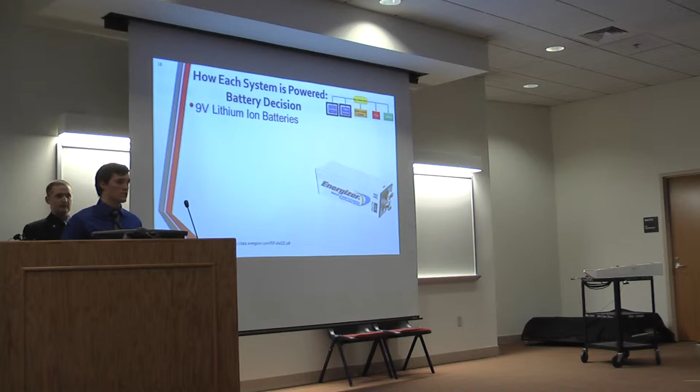For the battery decision, this was probably one of the most important decisions for me from a power standpoint: how we're going to power everything. We went with a 9-volt lithium-ion battery throughout for each system, because they're extremely light compared to alkaline batteries. The alkaline batteries are about 2 ounces; as shown here, it's 1.2 ounces for lithium.

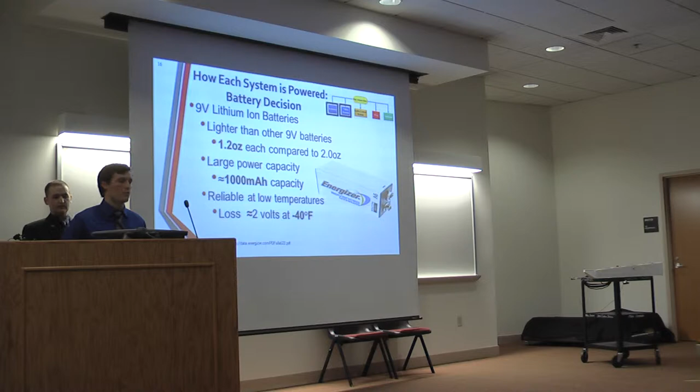Next, we also have a large power capacity. That's really important. An alkaline battery has about 600 milliamp hours. A lithium battery has 1,000, and it's lighter, so that's always important for our glider. It's also reliable in low temperatures, and it's very reliable under large loads, which is very important considering we have a large video system that takes up a lot of power.

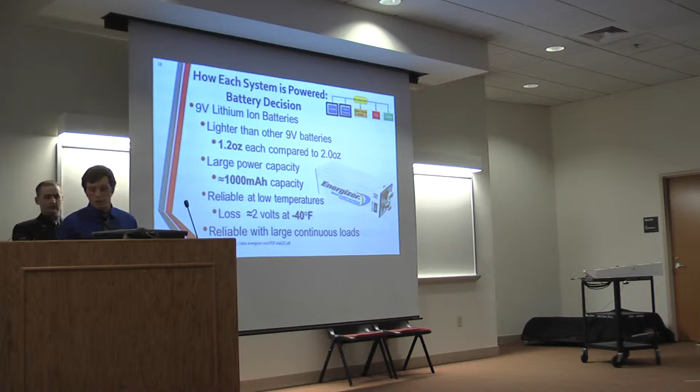So now I'm going to let Tanner talk about some materials. All right, when designing the fuselage that was going to hold all the components Jesse just talked about, we had a few design factors we really needed to look at. One was temperature. When you get to the higher altitudes, it begins to get colder and colder. Weight was probably the most important due to the FAA regulation of 6 pounds. Cost, and then also the strength, being able to hold the components and not just break apart.

So we narrowed it down to 3 common choices used in model aircraft: balsa wood, pine wood, and aluminum. In terms of strength, obviously aluminum is going to be the strongest. However, we found that all three materials met the requirement we were going to need. So we were pretty confident no matter which one we chose, strength-wise, we would be good.

In weight, when we drew the fuselage up and started modeling the different materials and seeing which would be the heaviest and lightest, balsa wood was going to weigh about half a pound compared to 3 and almost 8 pounds for the other materials. Then for cost, we found balsa wood was also going to be the cheapest, so ultimately we built it out of balsa wood.

This is the design of the fuselage. It was 32 inches long and we used a very standard truss structure down the length. The front of it was 6 inches tall, the back was 4 inches. This tapered shape is something you commonly see on model aircraft. And you can see on the bottom left picture at the bottom of the drawing, the line is a little thicker. That is representing the base plate that all the interior components were mounted to.

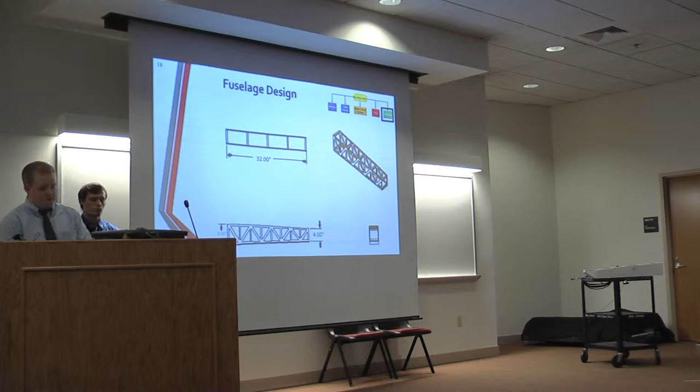So when we designed it, we knew we needed to do a little bit of analysis. We used a program called SolidWorks to do that. The purple arrows you see on the top picture are the applied force, and the green arrows are the fixed geometry areas. And on the bottom left, you can see that the main areas of deformation were on the vertical supports. But we did find that it was such a small amount that we weren't really concerned with it.

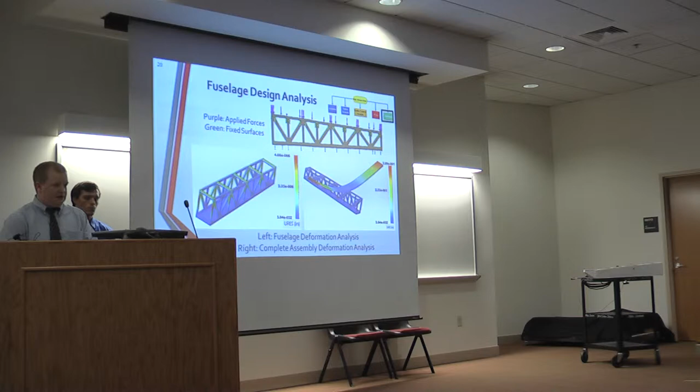And then on the right, what we tried to do was simulate lift under a basic wing. And as we expected, the highest deformation was at the tip of the wing. And once again, it really wasn't a very large number, so we weren't overly concerned with it as well. I'm going to pass it off to Aaron to give us a little aerodynamic design.

So we need to take those avionics and video systems that Jesse talked about, put them inside of Tanner's fuselage that he just discussed, and we need to make that fly. So that's where this wing design and aerodynamic analysis will come into play. So there are three primary areas for the wing design we need to consider. That would be your airfoil, your planform, and your structure. So the goal is to create an aerodynamically stable wing that produces sufficient lift.

It's 1/2 times the air density times velocity squared times the surface area of your wing times your coefficient of lift. The drag equation is pretty much the same equation, except instead of coefficient of lift, you have coefficient of drag. We have no control over air density. We have a little bit of control perhaps over velocity, but our primary areas of design would be the surface area of the wing and the coefficient of lift.

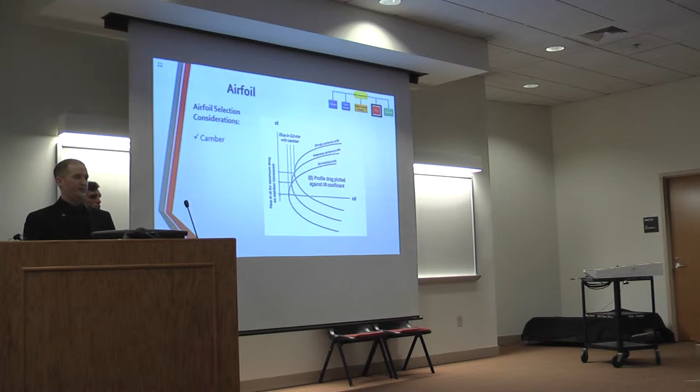And then also with camber, I have here plotted coefficient of lift in the y versus coefficient of drag in the x. As you get more camber, again, that more arched nature of your airfoil, you're going to move up and to the right on this graph. So a strongly cambered airfoil will produce a higher coefficient of lift, as we saw on the previous graph, but it will also make it so that you'll have a higher minimum coefficient of drag. A give and take nature with your camber of the airfoil.

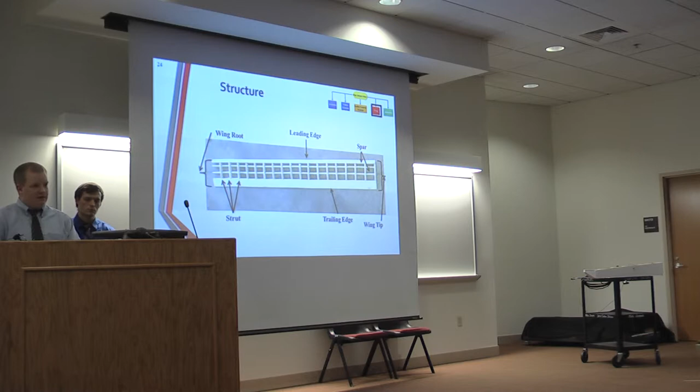So once we had everything together, we had to put together a weight budget and see how heavy we were actually going to be. We found that the glider weighed approximately 2 pounds, and the release pod that was going to drop the glider weighed roughly 1.5 pounds, giving us a total weight combined of 3.5 pounds, well under our 6-pound goal. So we were pleased to see that, just in case we needed to add anything. We had plenty of room in the weight budget. Pass it off to Jesse, who's going to talk about the project budget.

All right, for the project budget, we had some very important components that we had to purchase, and some of them were pretty expensive, like the video camera. Our total cost was $1,168. What was nice though is USI actually provides the Endeavor grant, and the Endeavor grant is really important for scientific research. We actually applied for it, and we did receive the award of $1,096. They helped reimburse the engineering department and ourselves for the project, so that was really good.

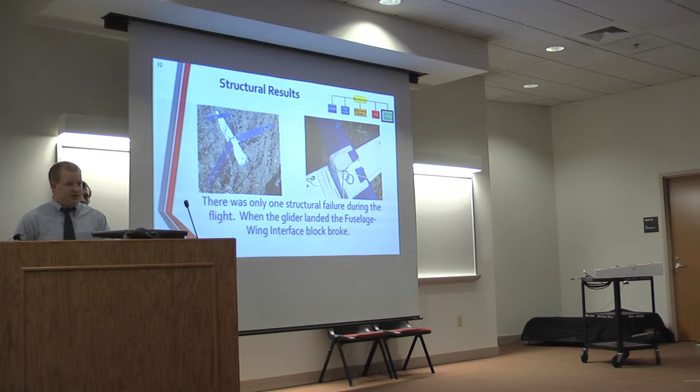So it wasn't a huge concern, but one thing we were talking about is the potential of changing the material of this block to something a little stiffer. Passed off to Aaron for aerodynamic results. So just to briefly discuss what we think the video shows as far as the aerodynamics. So I think it's a combination is what we're seeing.

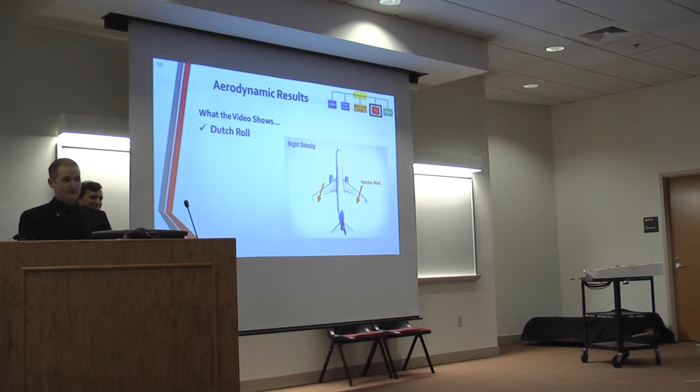So the first thing is what we call Dutch roll. I'm not talking about these sadly, but with Dutch roll, the nose of the aircraft will be pulled slightly to the right, and that wingtip will be pulled slightly down. Well, you have that dihedral I talked about earlier. It'll try to right your aircraft, and then the tail will generate a little bit of lift, and you'll get a left side slip. So it repeats itself, so you get this kind of tail wagging motion back and forth.

That comes from not having proper tail area. After the flight, we ran through the calculations and found our tail area should have been 27.6 square inches. However, we actually only had a tail area of 8 square inches. So quite a big deal there. You might say, though, that it's obviously not a back and forth motion, although we did see a left and right change. So I think the second thing going on is what we call static margin,

or rather an issue with our static margin. Static margin is simply the length between your center of gravity and your center of lift. So flight day we were trying to measure this, and I don't think we got it measured properly. So what I think happened is that rather than being about 12% back from leading edge like it should be, we were further forward, so that caused the nose to be pointed mostly to the ground and caused what we saw in the video.

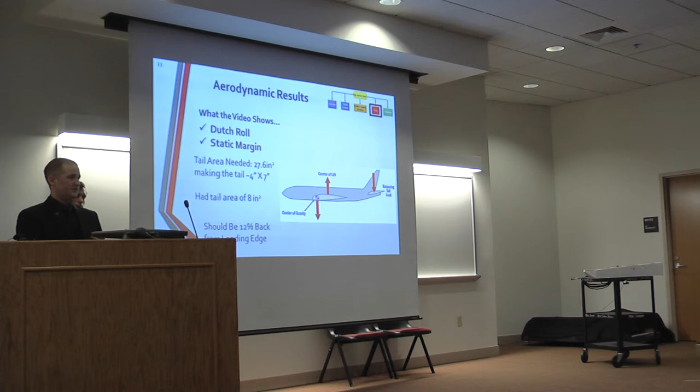It also could be that it was just a static margin issue, that our center of gravity was just too far forward and the wings simply stalled. So there may have been no Dutch roll, but it's quite a possibility. And I'm going to pass it on to Jesse to talk about our control system design. So for the future, and since we couldn't get the COA, we actually did design the radio control components of the glider. It's mainly in our paper, but we just would like to show you guys.

Basically, the radio control design would be communicating with the glider so we can control it on the way down. Basically, it's divided into two subsystems. We have the ground station, and we have the glider, and from the ground, we could actually use a remote to control it via live video. So that would be really neat. Now I'm gonna let Tanner talk about the control surfaces.

All right, so after looking into what we were going to need in order to control it, we determined we would need 3 different surfaces. We would need the ailerons highlighted in green, the elevators, which are highlighted in purple, and the rudder, which is highlighted in red. The elevators are used to control the pitch of the aircraft. The ailerons are used to control the roll, and the rudder controls the yaw. And you can kind of see what those entail on the picture on the right.

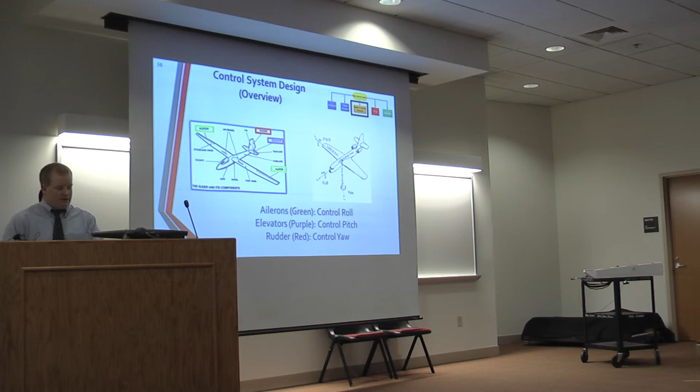So a basic layout of our elevator design, we're just going to use a standard control surface on the tail wing, connected to one linkage. Then the linkage would connect to where we were going to make a servo housing underneath the wing, figuring it would be the heaviest. And that's where the red linkage on the picture you see is headed towards. Didn't really fit in the picture.

For the ailerons, it was the same idea. The servos that would control it were in the same area. There'd be a shaft run through the ailerons on the wing that would control them. And the picture on the bottom is kind of representing what the ailerons would do. When the servo was at plus 90 degrees, the aileron would be facing up. When it was at 0, it would be leveled out, which is in the black.

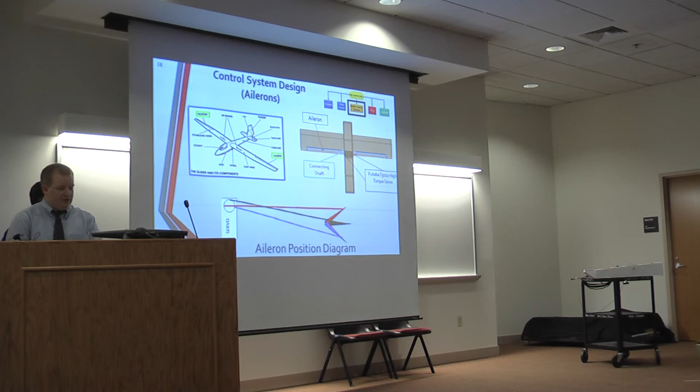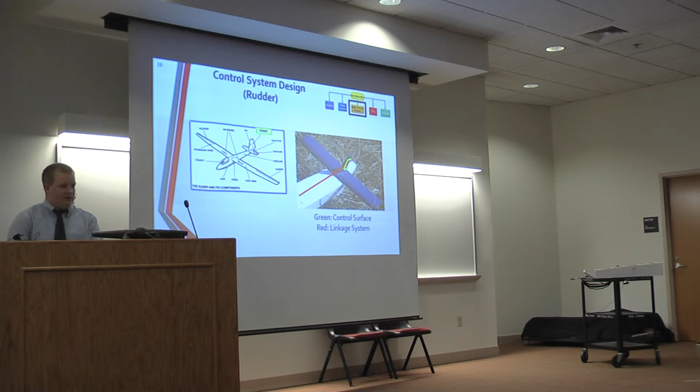And then the purple is minus 90 degrees facing down. And then for the rudder, it was the same idea as the elevators from the tail: control surface with the linkage headed back to our servo housing. We figured all 3 of these systems would probably control it. The long-range control of it was our main concern, though.

Finally, I'd like to finish with some acknowledgments. I'd like to thank our advisor, Dr. Davis. I'd also like to thank Dr. Glenn Kissel and his entire Engineering 471 and 290 class for letting us fly on their balloon. I'd like to thank Dr. Mitchell for signing off on all the different purchase requests we kept giving him. And we'd also like to thank Donna Moore for submitting all of the purchase requests that we did.

We'd like to thank Mark Foisey. He was our FAA contact. And we'd like to thank Vince Frazier for getting us started on contacting the FAA and who we needed to call. And then finally, we'd like to thank Dr. Jane Johansson from Endeavor. She was who helped us get the grant we needed.

Any questions? And the glider's up here if anybody wants to come up and see it. Questions? Yeah, I was just wondering, before you guys launched, did you do any kind of aerodynamic testing, like dropping it off a building or something like that? Due to the time constraints, we weren't really able to fully get the testing we wanted. We did plan on doing that, but we weren't able to get the glider done quite in time to be able to do that without risking damaging the plane.

What's the skin made of? It's called Monokote, commonly used RC hobbyist kind of thing they put on the plane. I don't remember the exact material, but Monokote. He did one coating around all of the surfaces on the outside. Can you explain how it works? The Monokote? Yeah, it's applied using a heat iron. You lay it on the side and you have to very carefully iron it on. Aaron spent, I think, 6 hours on each wing trying to make them smooth. It takes a long time to do.